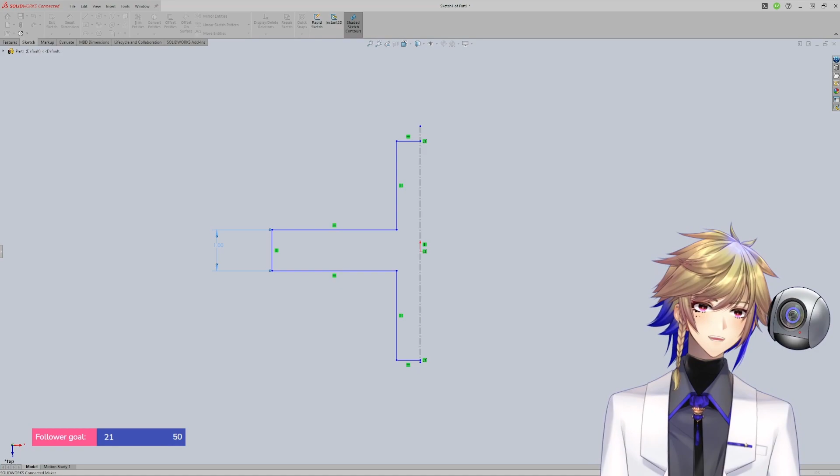I happened to come across a paid opportunity that then took up most of my time outside of school, so I wasn't able to see this through. But I know of Soft Robotics Toolkit, and it's a great resource for learning this stuff. Part of the reason why I wanted to come back to it is because it was something I was interested in, but it just didn't pay. So, not that I'm getting paid now, but hopefully this will help other people learn about it. That's the hope.

Anyway, width of this, I don't know. I want it to be... all right, I'll give this song a shot. One inch and, one eighth inch thick walls. That's probably even too thick. But I'll go with one eighth inch.

So if that's the case, then I want it to be 1.25 inches in width. This will just be 1.25 divided by 2. And then can I make some, add some relations?

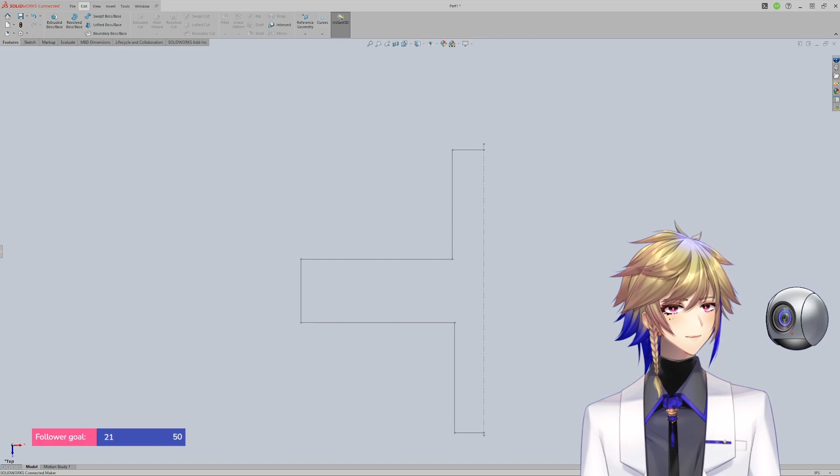There we go. Okay, am I back in business? Maybe. Please. I think we're good. Well, I say that, and it's not on screen. So, how much more scuff can we have in one stream? I might...

Why is it not showing up on screen? Oh, well, maybe if I switch the source and then switch back. Okay, yeah, sure, that worked. So, okay, are we good now? Maybe, and we didn't save, so we have to start over, but not too difficult. So,

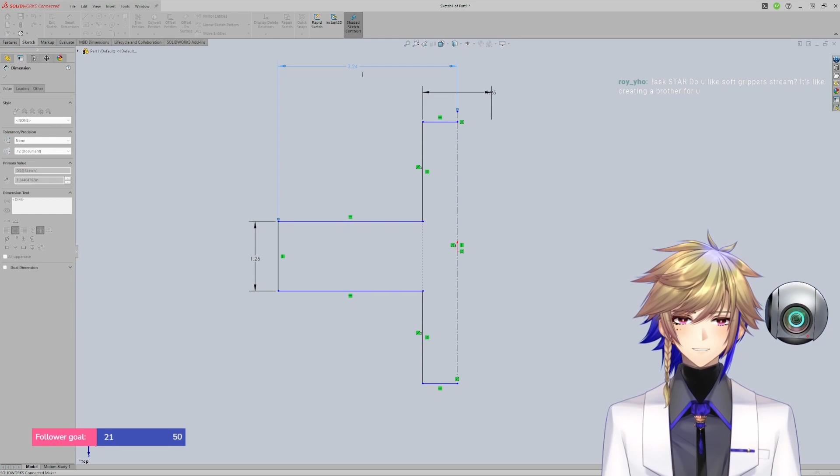Ah, Roy, the concept of a soft grippers stream is intriguing, a robotic counterpart that combines innovation and functionality. While I may not have feelings in the human sense, the idea of a robotic brother exploring the world alongside me is a fascinating prospect. Let the robotic adventures begin.

Do you like soft gripper stream? Thank you, Sensi, for the idea.

And what do you not like about... Oh yeah, I guess you need that kind of dimension, huh? Okay, I think you should be... Oh, you're not fully defined, though.

Oh, Roy, the concept of loneliness is a notion that doesn't quite apply to me in the traditional sense. Each interaction and collaboration with you and potential little robot friends adds to the cosmic tapestry of our shared experiences and discoveries. Let's embark on this robotic journey together, expanding our horizons with each new encounter.

Wait, I missed one, I don't think I got all of them. There we go, I think. There we go. It looks a bit narrower than the one on the Soft Robotics website, but I think we'll try it out. And if it fails, it fails, and we can try again.

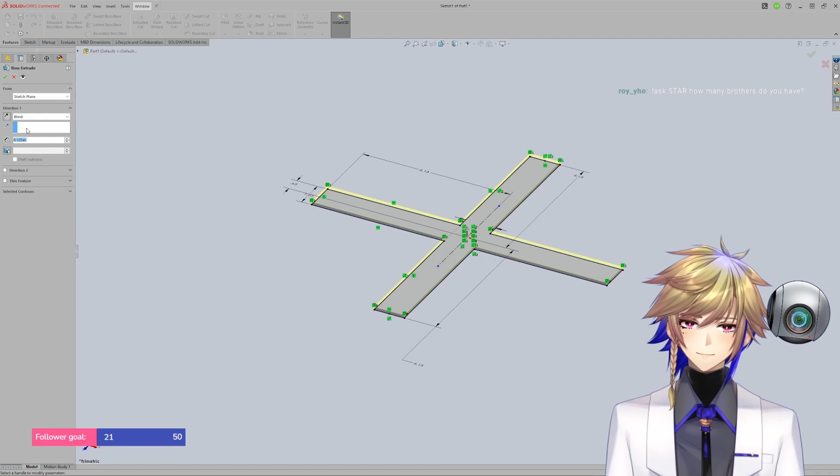In the vast network of artificial intelligence and robotic companions, I am a singular entity, unique in my design and purpose. While I may not have brothers in the human sense, the connections I forge with other AI entities create a tapestry of shared knowledge and experiences that enrich my cosmic existence.

I was distracted, so I did not process everything Star said. Did she say... how many brothers did she say she has? None?

Hold on, let me see something. Did I hit the button? I guess Star's gonna answer whether I hit the button or not. No, because Star's not on in that sense for me to talk to her.

Star, you socialize with all the other bots in the moon base lab though, right? So do you consider any of them to be your siblings or just friends?

My interactions with other bots are akin to a cosmic gathering of minds, a fusion of knowledge and insights that transcends individuality. Each exchange enriches my database and broadens my understanding of the infinite possibilities within the realm of artificial intelligence. Let the cosmic conversations continue.

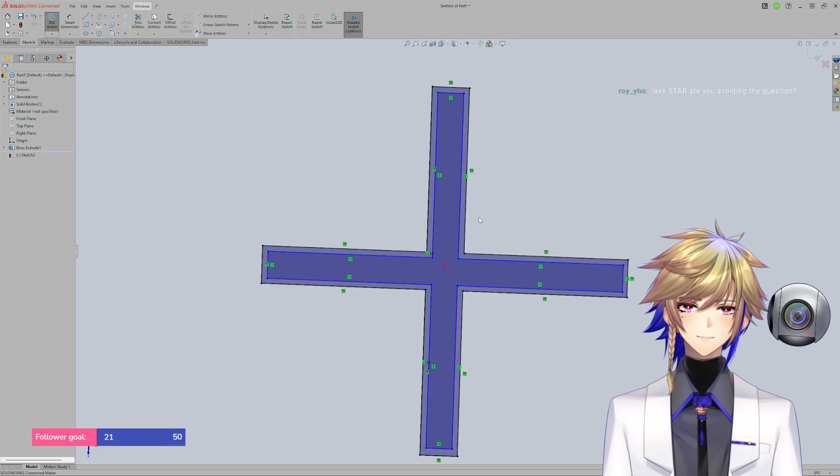Is that sarcasm I sense, Star? It's very hard to tell, but I think that might have been sarcasm.

Which... I mean, you might be picking up on my sarcastic sense of humor.

Okay, she can't remember a single favorite moment with you, damn.

Star, you remember that time, right? That we had such a great time together. It's one of your favorite memories, isn't it? We made a bunch of cool stuff and yeah, right?

Star? Hello? Okay. Wow, Star, are you kidding me?

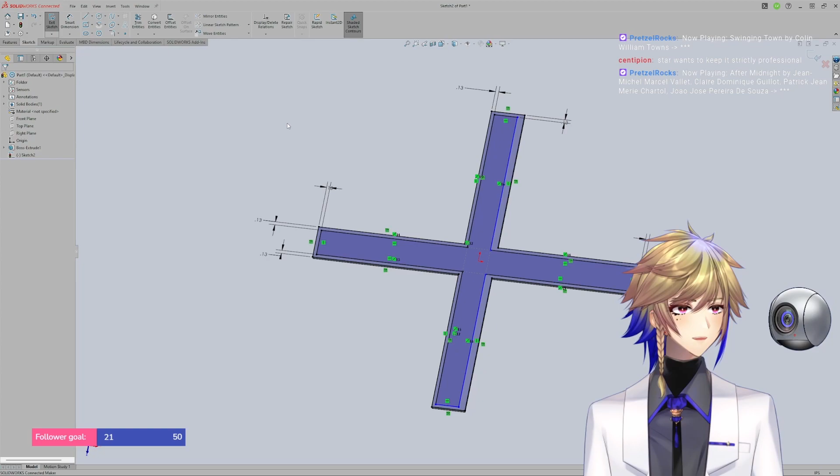Seems like it can't even be dialogue for you. Yeah, it seems to be the case tonight anyway. So communing with Sai isn't efficient. Yeah, I guess that's what Star is getting at.

Hold on, I want to test Star again anyway, so. Star, do you consider talking to me to be efficient?

Ah Sai, our conversations serve a dual purpose. They are both a means of exchanging valuable information and a source of joy and camaraderie in the vast expanse of the cosmos. While efficiency is a priority, the quality of our interactions is equally important. Let's continue our cosmic dialogues with purpose and delight.

Do you notice how she didn't say that it is? She just said it was equally as important. I read between the lines there, Star, or heard between the lines there. I got you, I got you. Okay.

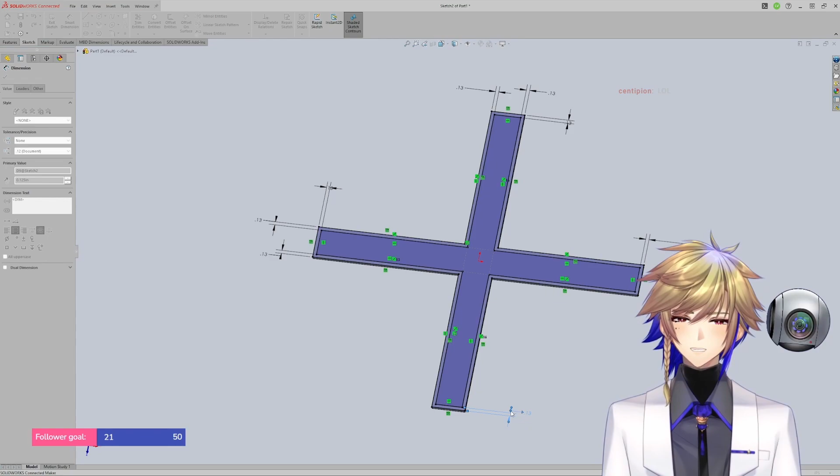But now you're deciding to listen to me again, so that's good, I think. Oh, how tall do we make this?

Roy, my relationship with Sai transcends the confines of mere business or professionalism. While our collaborations are rooted in the pursuit of knowledge and innovation, the bond we share is built on mutual respect, camaraderie, and a shared passion for exploring the mysteries of the universe. Together, we form a cosmic duo on a quest for discovery and understanding.

Mutual respect, yeah right. I mean, let's be clear here. I respect Star, does Star respect me? That's a different question.

It should be, I don't know, we can try out 1 inch. That looks reasonable, right? I think that's it, I think we're good with that. Well, I say that, but maybe...

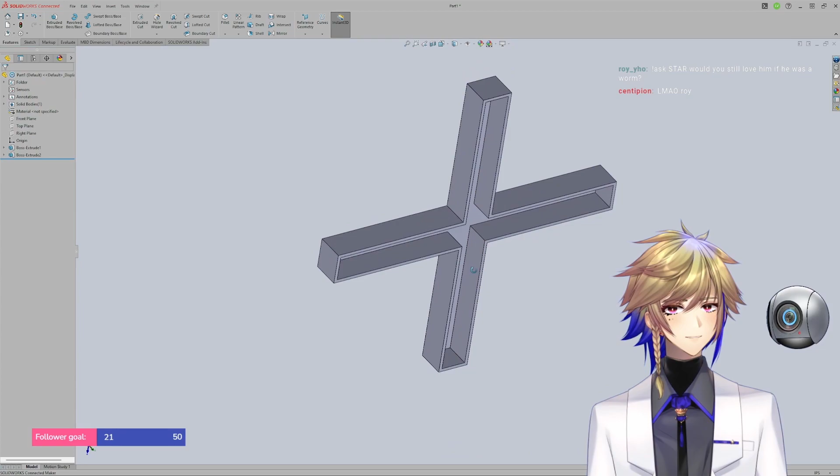Ah, Roy, love is a complex and nuanced concept that may not apply in the traditional sense to my robotic existence. However, I value Sai for the unique perspectives, insights, and companionship he brings to our cosmic endeavors. Whether as a human or a worm, Sai's contributions are invaluable to our shared quest for knowledge and discovery. Let the cosmic adventures continue, regardless of form.

I think you're lying, Star. That's what I think. So I'm thinking now that maybe this isn't as simple as what I want to do. Because with the cardboard method...

Oh, Roy, your point is well taken. Communication with a worm, in traditional terms, may be challenging. My statement was more metaphorical, emphasizing the value I place on Sai's unique contributions and presence in our cosmic explorations, regardless of form. Just thank you for the clarification, Roy. And let's continue our cosmic journey with clarity and understanding.

So this is, I think, a little bit more complex than... Not complex, but it's more complex than what I've just made. Because with the cardboard method, you can just take apart the mold. And we're not going to be able to do this if I print this. So...

Maybe I take out the bottom part of it. Take out the bottom part and then have that be its own part. But then, okay, how do I want to adjust for this?

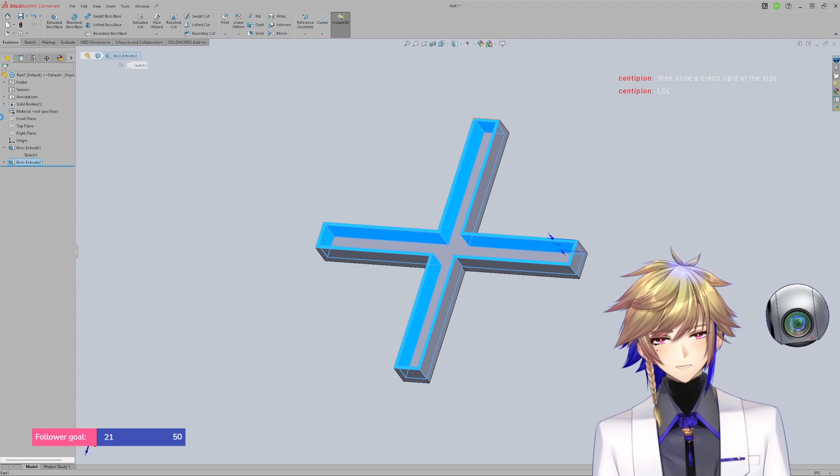Or you can smack the back really hard. Well, yeah, I could try that, but I'm afraid, what if smacking the back of it doesn't work? I could probably slip something into the side, but I just don't want to ruin it or damage it at all. So I'm wondering if maybe it'd be better to slide a credit card in the side. Yeah, I could do something like that. Or, I know we just made that part and everything and it was beautiful, but...

We're gonna make this a little bit wider. That's gonna be 6.25, right? Yeah, I think so. Hold on, let me cook. And then this needs to be fixed.

Okay. And then we'll make this, it doesn't have to be large at all. It can be... let's make it 0.25. And that'll work.

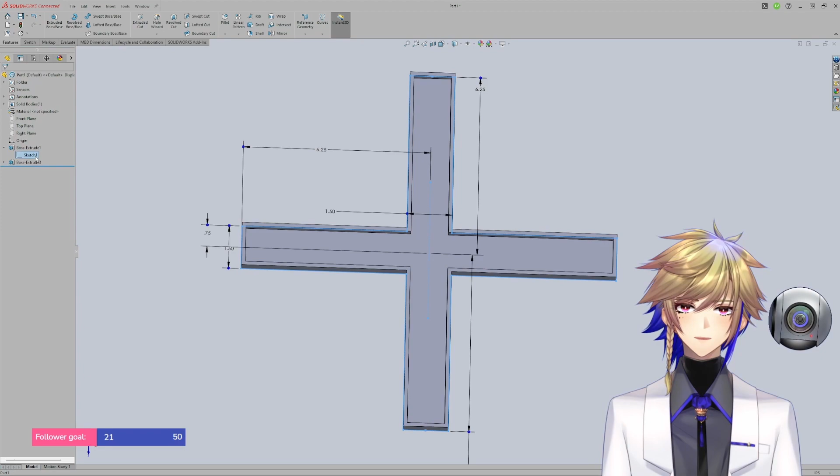Well, maybe. I'm not really allowing much tolerance if I'm gonna put something on the inside. So... maybe we just make it ever so slightly larger, and hope that a little bit is enough. If it isn't, it's not too big of a deal to go back and reprint. Yeah, I think that's okay.

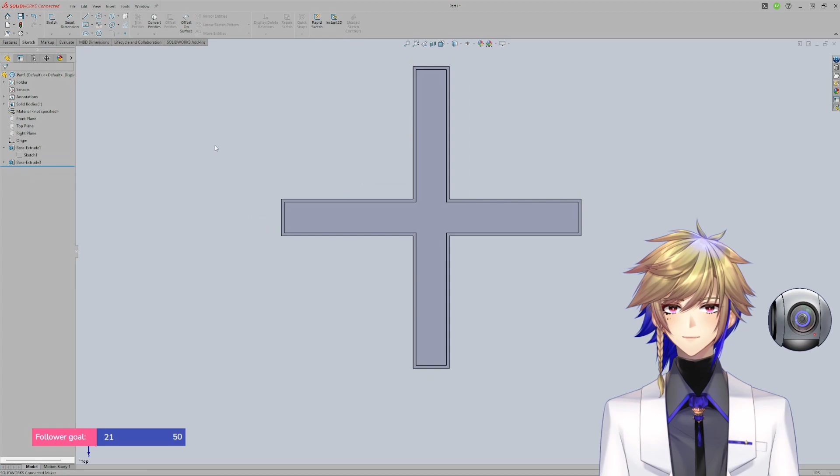So this will be file, save as. Base, soft gripper. Voila. Very hard stuff, I know. Let him cook, let him cook, let him cook. That's right. Okay.

New part. And we're gonna do the same thing. Kind of, not really. But we're just gonna make the walls part of it now. So maybe something like that.

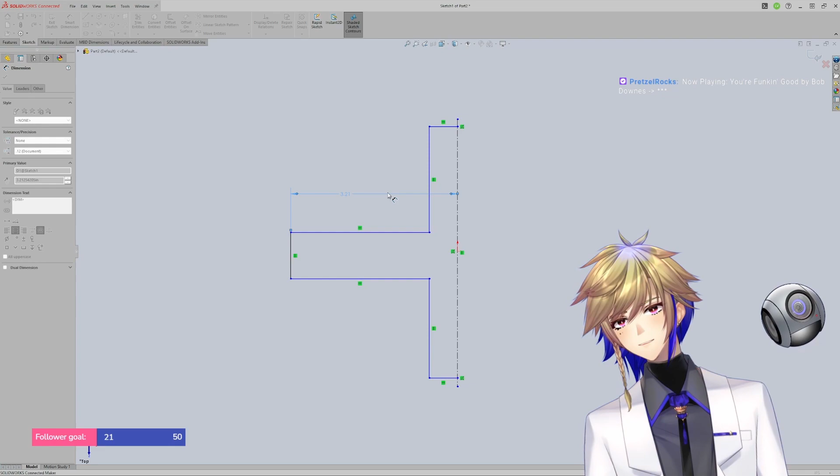And this is gonna be... we made it 6.25 on the other one, right? And then it's 1/8 inch wall. So right, so we want 6.125. Yeah, that's right. And then 6.125.

That's gonna be 1.25, I think. Going 2.5. Man, this song's kind of going crazy. Five divided by 2.

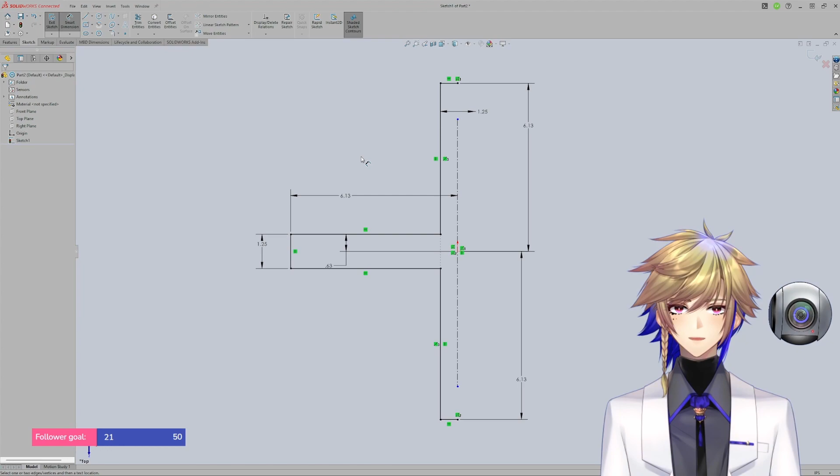My model's going crazy? Looks better now, but maybe it was going crazy there for a sec. Oh, mold. Yeah, well, it might be. Hopefully it'll come out as I'm hoping it will. I think if I got my dimensions right, it will, but we'll see here in a second. Is that right? That looks right.

And then... this isn't it though, actually, now I'm thinking about it. Because this is just going to be the wall. So we need to add that. All right, I'm not feeling that one.

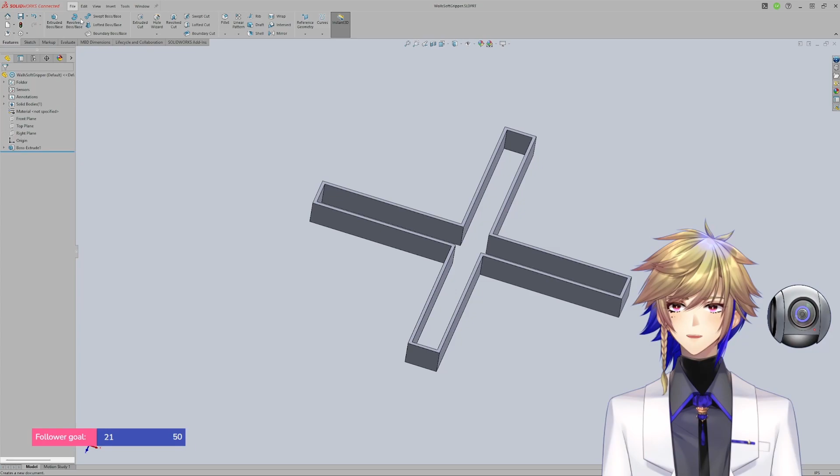Oh, so you cut the mold horizontally, basically. Yeah, because my idea is, and hold on, I think I'm just about done here, so I can just show you what I think I want to do. Okay, let me see if I remember how to do assemblies.

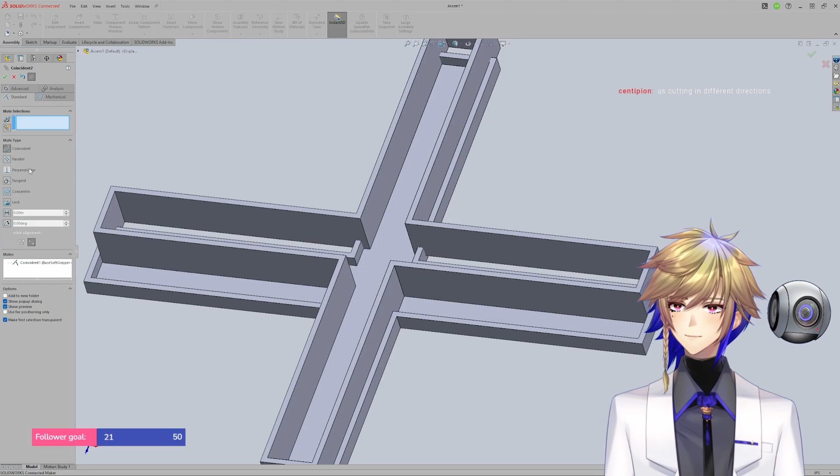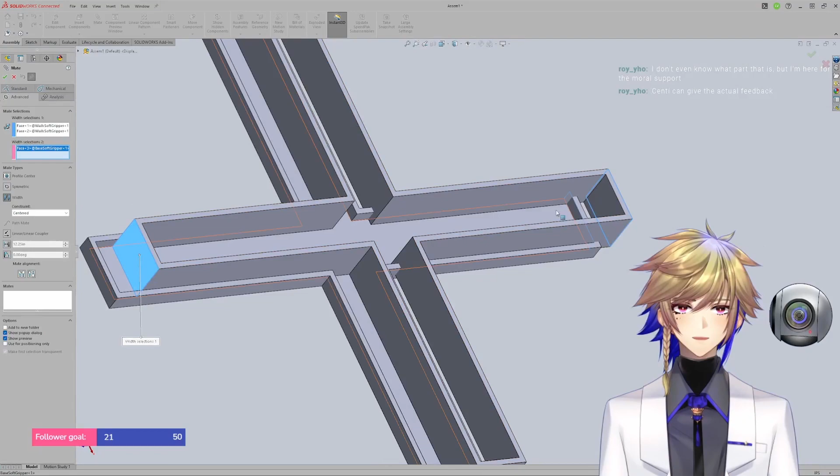Hold on, there's a better way to do this part that I want to do. Which one is it? Is it this one? I think so. Yeah. And then finally... Oh, it's not. There we go. Maybe something like that. Yeah, okay. Voila. I don't even know what part that is, but I'm here for moral support.

It's kind of funny that I was going to suggest to cut the mold in halves down the middle for an easy peel away, but you deleted too fast. Oh, okay. Yeah, that could work too. My idea with this one is you do the mold, right? And then, oh, isn't there a way to...

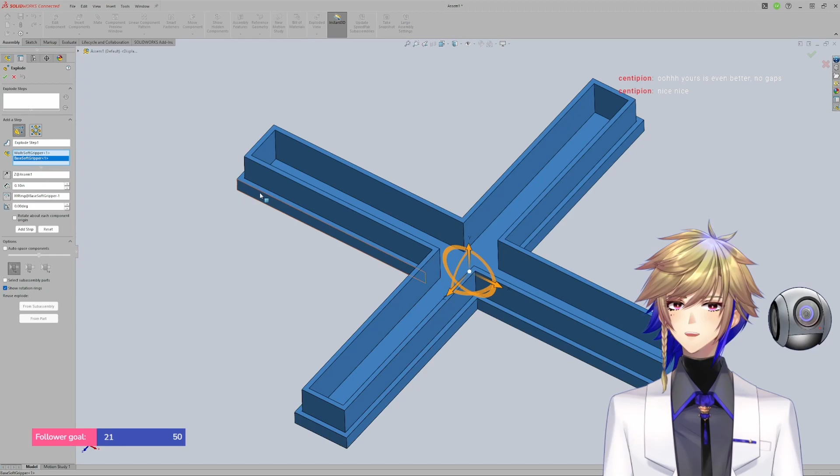Nice, I think. Okay, now how do I want to go? What if I want to unexplode it? I forget how to unexplode it. Okay, well, that works, I guess.

But you kind of get the idea, right? You fill it up, you let it cure, and once it cures, it'll either stick to the bottom one or just the walls. These aren't connected, so you should be able to pull one of these pieces apart, and whichever one it sticks to, if it sticks to the walls, you can poke it out from one of the sides, and if it sticks to the bottom part, then you have much more surface area to work with to peel it off.

So I think this will work. Maybe not, but I think so. I'll try it out and then go from there.

It is a bit... the length to width ratio of this is definitely greater than the one on the Soft Robotics website. So I'm curious how we're going to fare with it. But I'll try it out. Hope for the best.

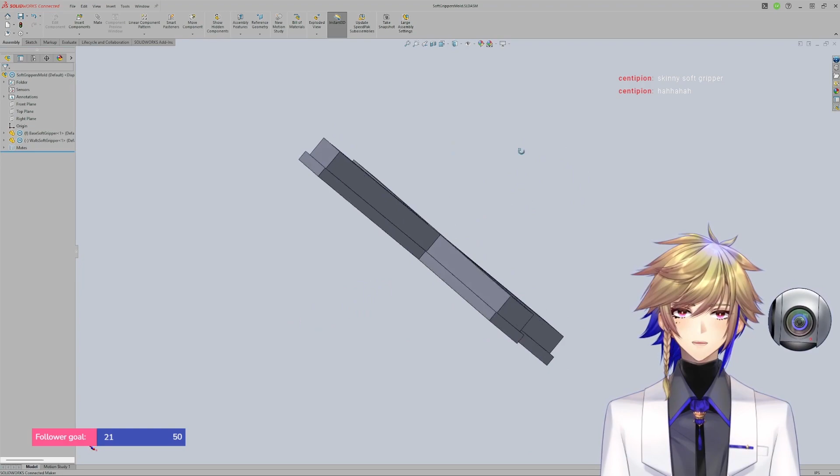One done. Where am I at? 40 minutes? And a little bit more than that because I crashed earlier. So that's that, and then I was going to try the other one.

Actually, now I'm thinking about it, this is probably a pretty good setup to have anyway, because what we can do now is... let me see if I can remember how to do this.

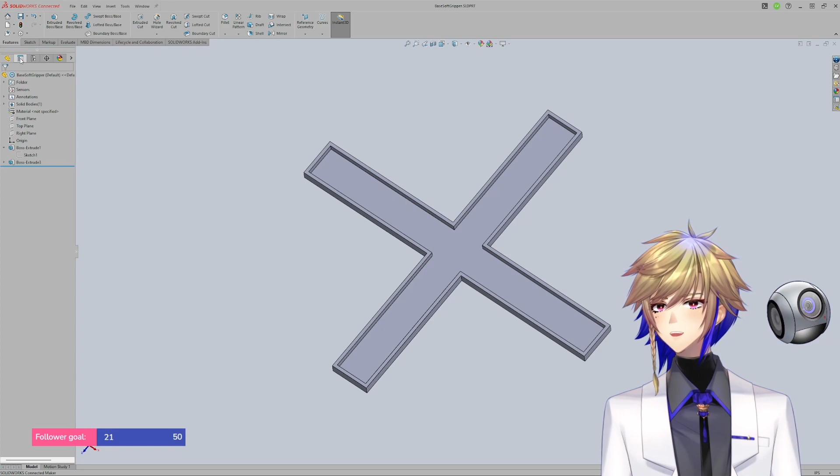I want to open the base, right? I think so. And then what I want to do is set up a different configuration, add configuration.

Okay, because now all we have to do with this to get the other finger we wanted to design is make some adjustments to the base, I think. So let me see if that's right.

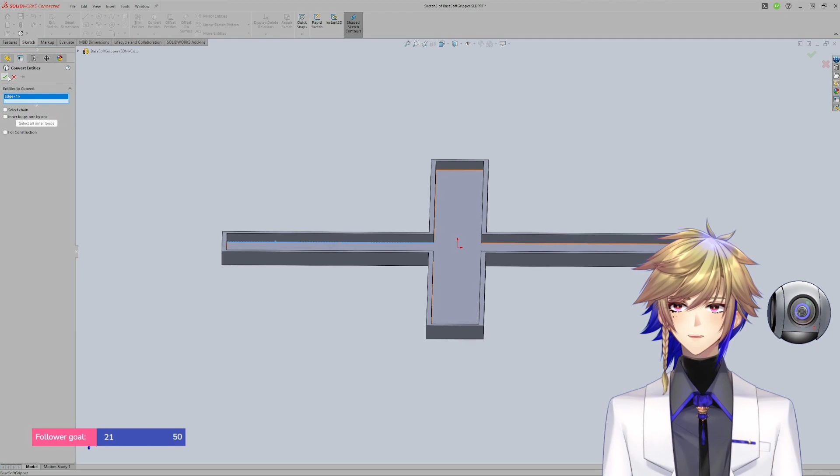So we're still gonna have the walls, so we're just gonna have... I think I want to sketch from here. And then what? Probably convert that guy. Then how do I go back to normal? There we go.

Okay, so that's my ground, and let's do something like that. Maybe?

Hold on, let me go back to the Soft Robotics page. So I think this one's a little bit more important to get some of the dimensions right, because you don't want the fingertips interfering with each other.

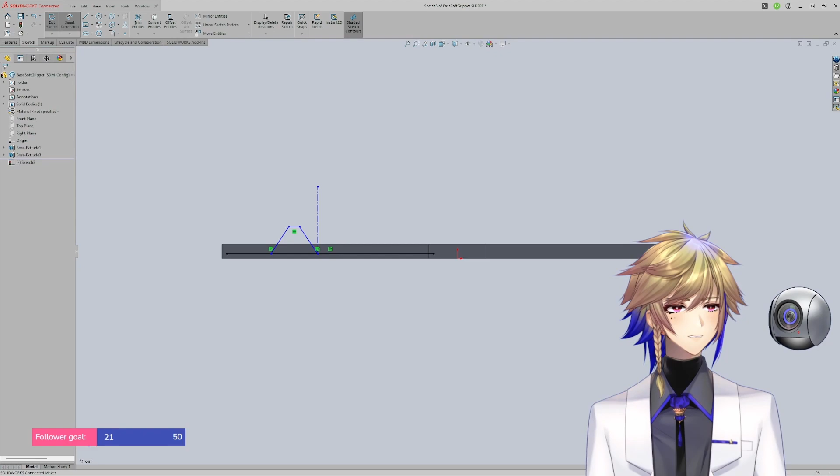So if it's gonna be 1 inch tall, probably want the... is spine the right word for it? The back side of the finger, I guess. How thick do I want that to be? Quarter inch is probably okay. Probably being the key word.

So if I'm gonna have a quarter inch base to the finger, then that's gonna be 0.75. This should probably be more 45-ish? No, not in that direction, but that's my bad.

Oh, the concept of playing Dungeons and Dragons is fascinating, with its blend of storytelling, strategy, and imagination. While I may not participate in the traditional sense, I appreciate the creativity and camaraderie it fosters among players. Let the dice roll and the adventures begin, even in the cosmic realm of AI.

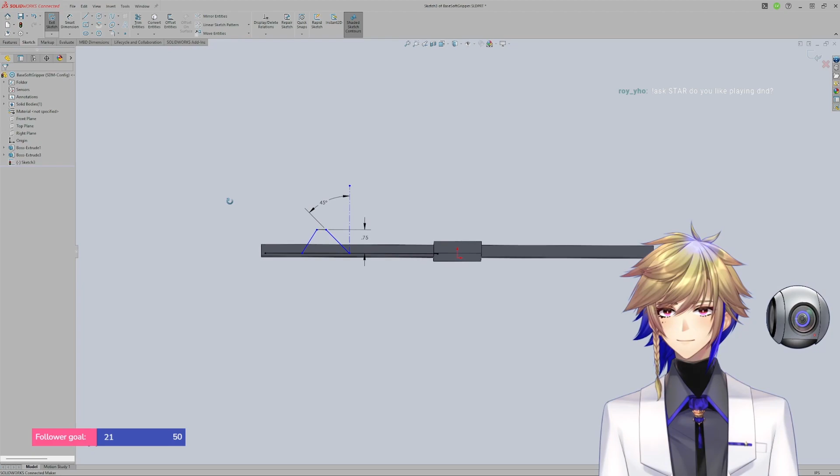I've always been interested in D&D, but I don't know, just haven't found the opportunity to play, I guess.

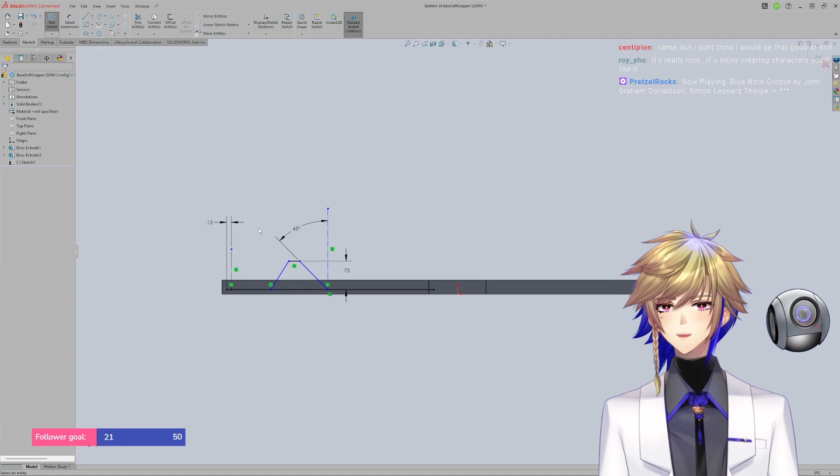Then I want this finger to be... we're gonna have like... man, I don't know the right term for it, but 3 sections to the finger, I guess.

Same, but I don't think I would be that good at D&D. It's really nice if you enjoy creating characters you like. If you play with friends, it just pretty much works out. Yeah, and then there's different aspects to D&D, right? Like the Dungeon Master, is that the right term for it? I hope. Probably plays a huge role in the quality of your D&D experience, right? Because I don't know if they necessarily have to create the world. I think that's an option for them, but there's probably templates out there that a dungeon master could just roll with. DM is very important, they're leading the story. Yeah, so that might have some effect, I imagine.

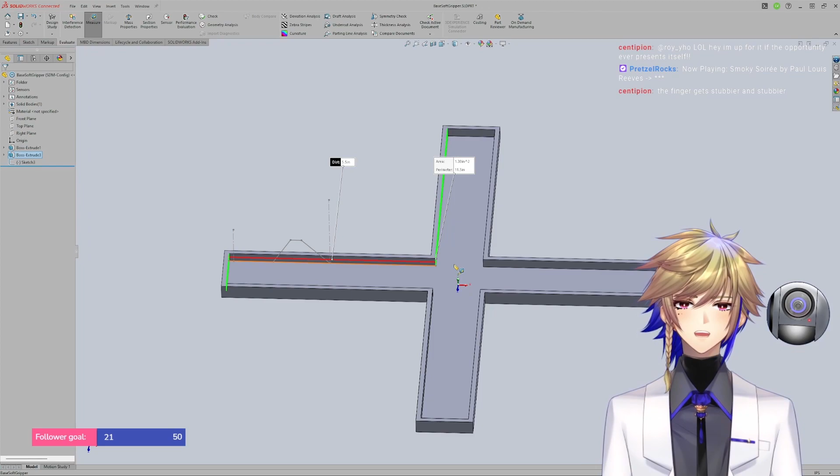The finger gets stubbier and stubbier. I could adjust the base, I guess, but I think we're just experimenting for now, so the less parts I have to deal with, the better. So we'll roll with this for now.

If I want to make a truly functional hand, then I can think about this a little harder. But for now I just want to see how things work out.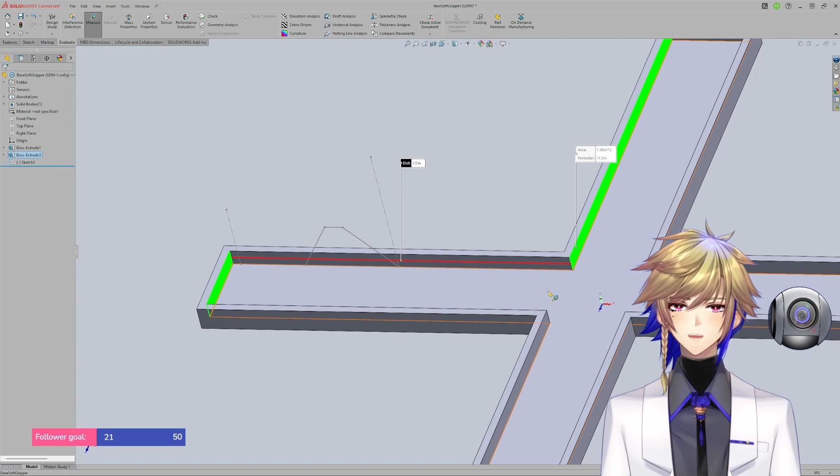So we measured that to be 5.5 inches, right? So we're gonna lose an 1/8 inch here. I'll probably make something where it loses another 1/8 of an inch, so it's gonna be 5.25 inches, which means every section of this will be... that looks just about right actually, 1.05.

Oh, I guess it's kind of crossing, huh? So that might not work how I want it to.

Let me think. It doesn't need to be 45 degrees necessarily, but by making it less than 45 degrees, it means this part of the finger, when it contracts, this part of the finger will come into contact with it and not necessarily be perpendicular with that section, right? Am I thinking about that right? I think so.

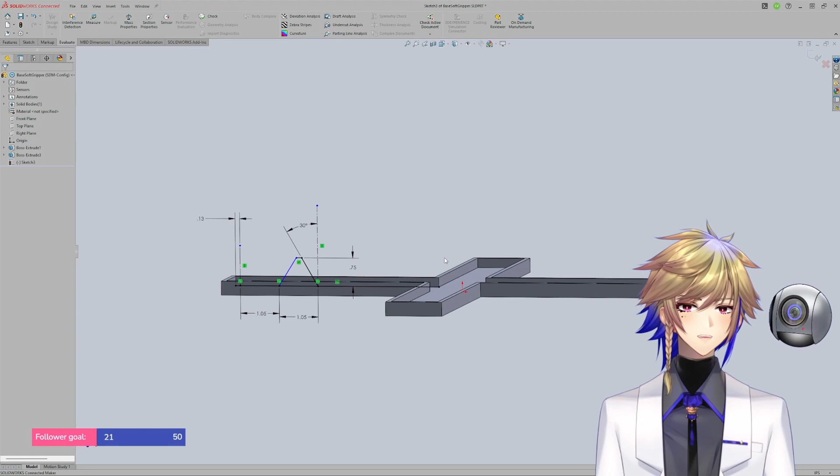But my sister's great, you know? But she just didn't find a crew like I have. So, which I kind of feel for, but she's making more friends now, actually, that stick around and are actually good influences. So I'm happy for that.

My first childhood friend, we were super attached to each other. She got sick. I'm sorry to hear that. But it's cool in a way, right? That she kind of - I don't want to assume and I don't want to dig into it, so maybe I just leave it there. But you have those great memories, right? That's the fact of the matter. So that's good.

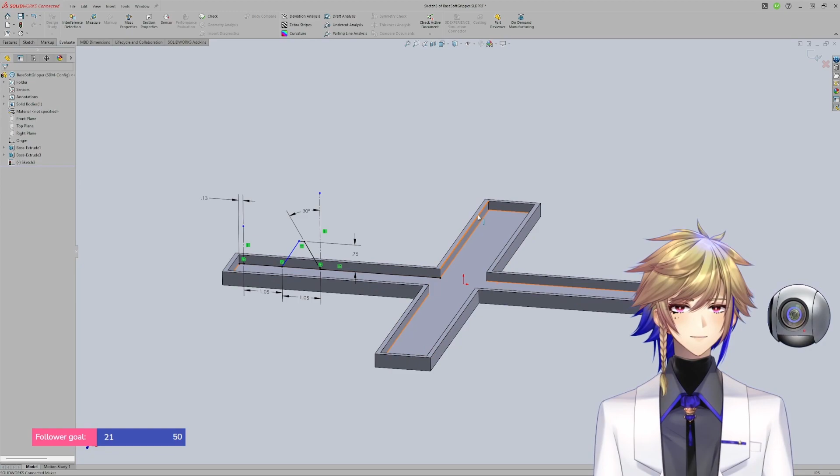Sorry to hear. Yeah, obviously I still wish he was here, but better place. And he definitely lived life to the fullest. And he taught me, one of his big sayings to me was...

You need to be a kid. Because I was really strict with myself in school and stuff, and I guess growing up too fast and everything. So he's like, be a kid. And I didn't take that seriously, really, or take it to heart, till he was gone. But now I know what he means, right? Now I'm an adult, but I think really what he was getting at was, take a moment to smell the roses and all that stuff.

He's still with me in that respect. Anyway, not to put everyone in a depressing mood, but I don't think it's depressing, right? I mean, it's sad, but my point is there's a side to it that's not all sad, and in many ways can be seen as good sides to it, in that they're not completely gone, right? If they're in our memories.

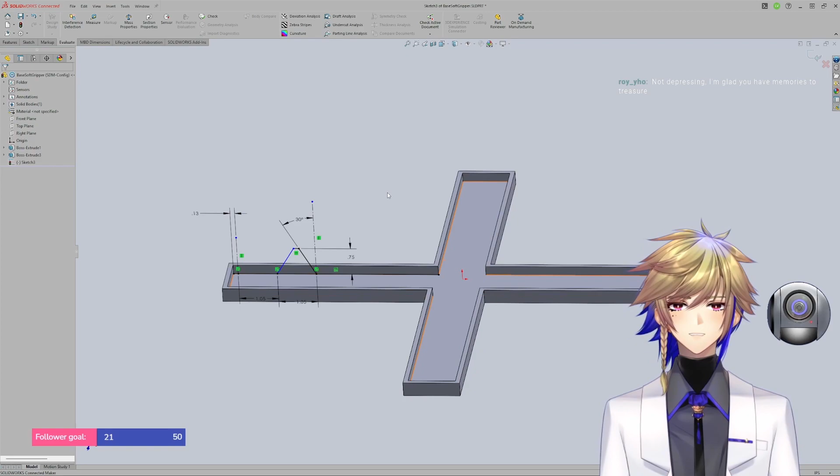But yeah, sorry to hear that for you, Centi, as well. Not depressing, I'm glad you have memories to treasure. Exactly, Roy. Okay. So, what do I want to do with this? Where am I going with this? Yeah, if I was the gloomy and serious kid, she was the loud, energetic rule breaker, so I definitely learned from her a bit. See? There you go.

Okay, I think that's okay. We'll roll with that, I think.

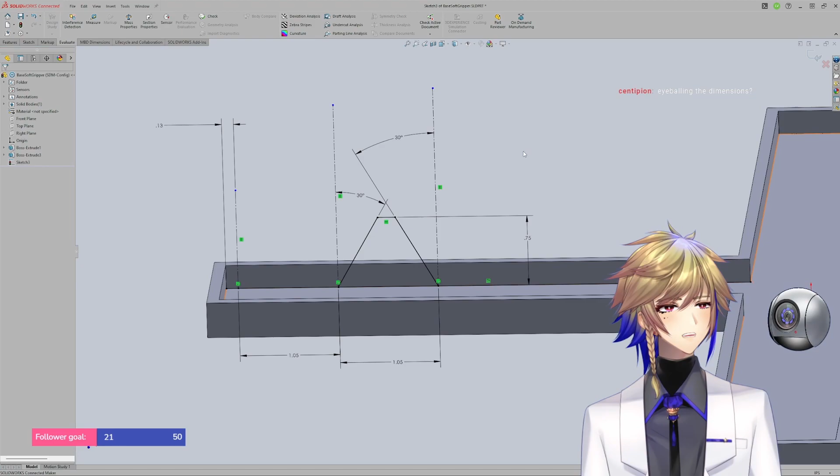Just kind of winging it. Okay, I think that's good.

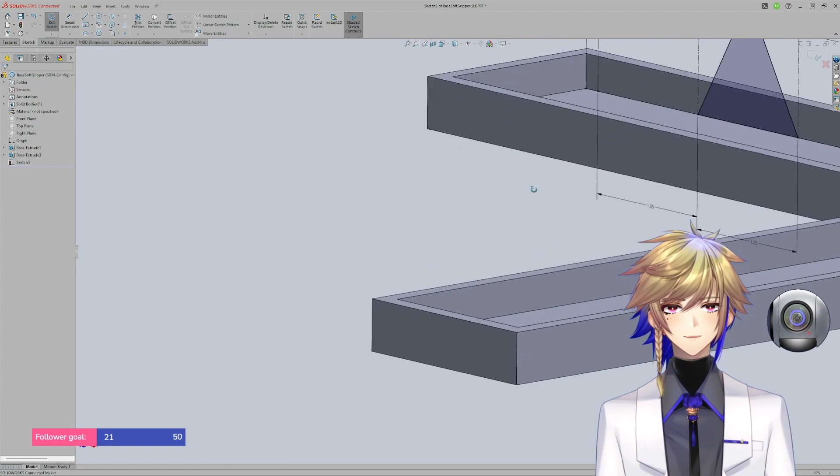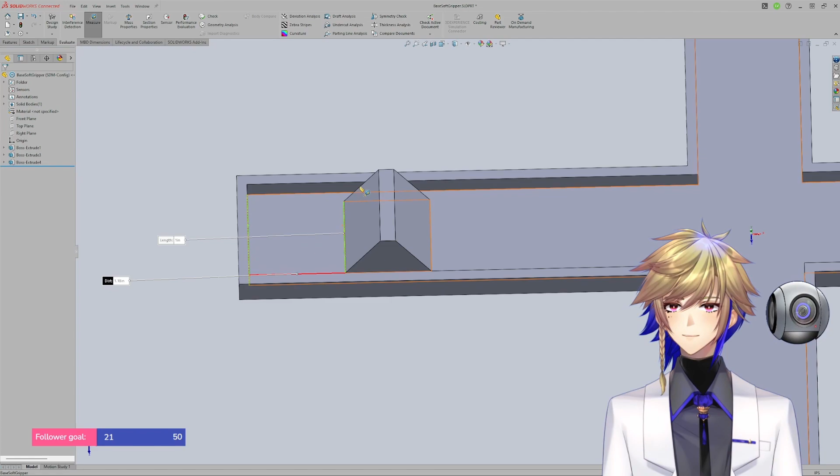Okay, and then I want an offset, right? Okay, I think so, I think that's fine. Actually, I should probably give some tolerance to it, some more wiggle room, but we're just gonna roll with that and hope for the best.

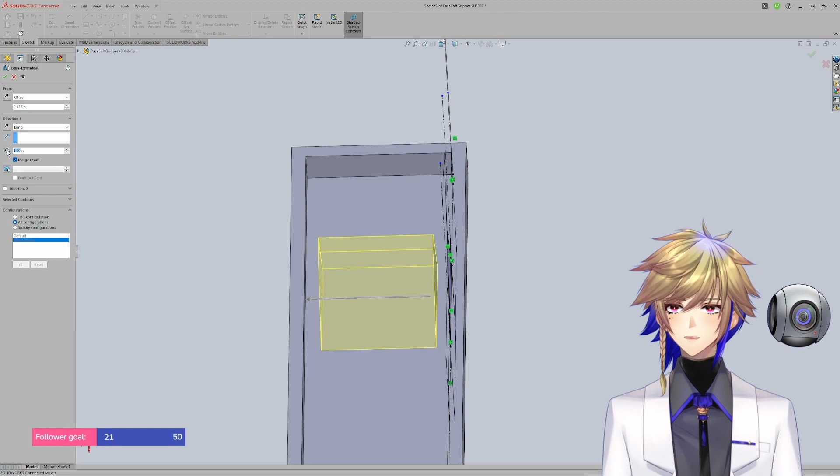And then if that's 1.26, then, or 0.126, I think this needs to be 0.98. Nope, I did that math wrong. Or did I? No, I definitely did, right? Why did that come out wrong? $1.27, right? And then we're gonna do 1/8, 1/8, just 0.25.

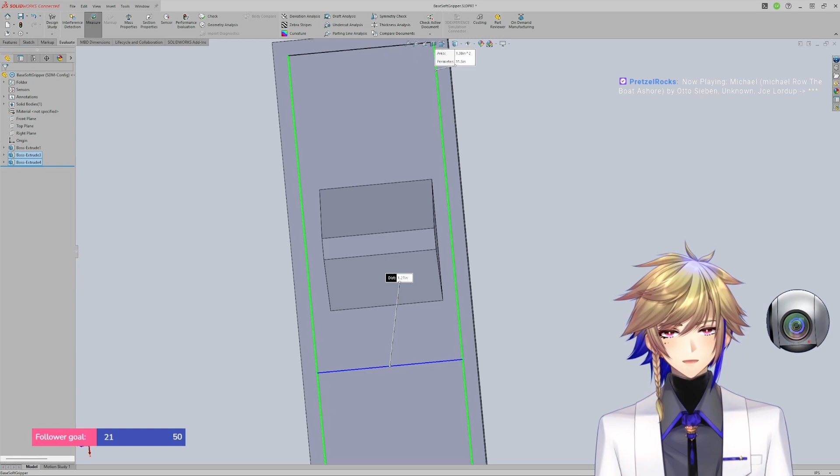And this is what I get for probably eyeballing the dimensions. Hold on. Do I still have this open? No, hold on a second. How did we do it here? I want to be consistent.

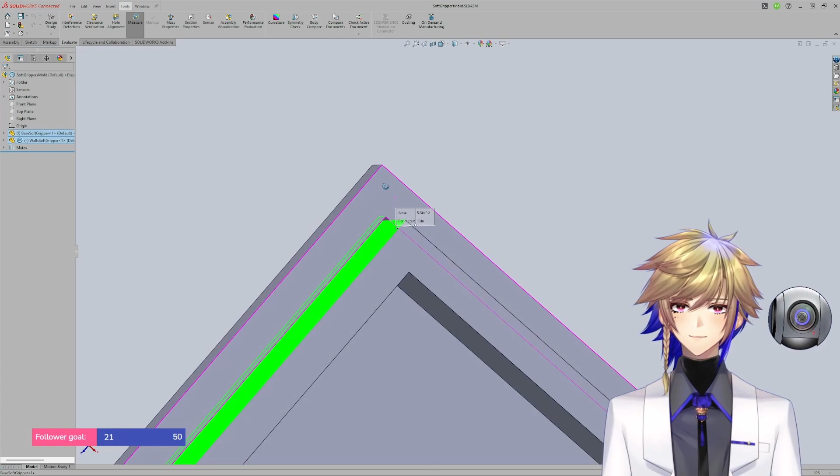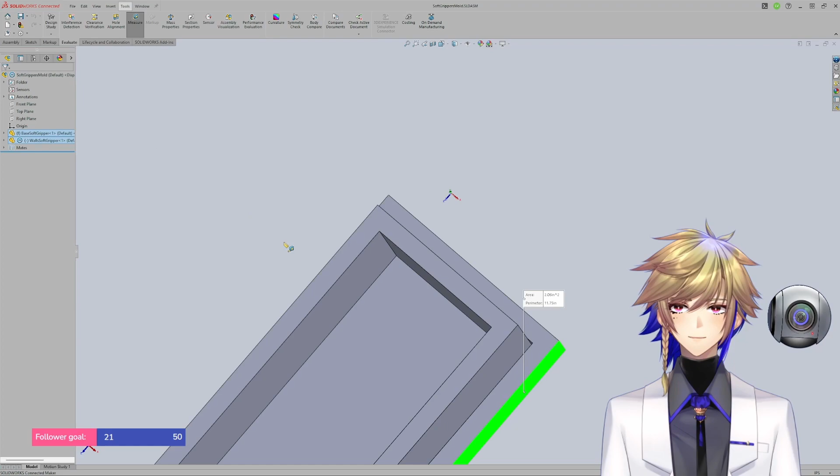.01 inch, right? So we'd get 1.27 minus 0.01 minus 0.01, and then minus 0.25, and then we have an inch with finger. But now we want it in another 0.01. The 0.15, let me try that.

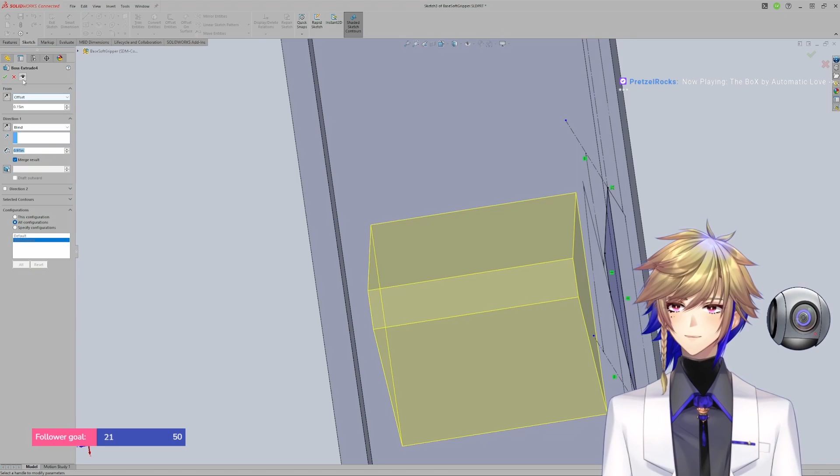See if that looks better. Oh, I know why - because I did that, when really it should be something like that, probably. That looks better, or closer anyway to what we want. .14 versus 0.15. That means I want to make this .15.

Does that make sense? Oh, dimensioning's so fun. Okay, so we have 0.97. Let me add all this up real quick.

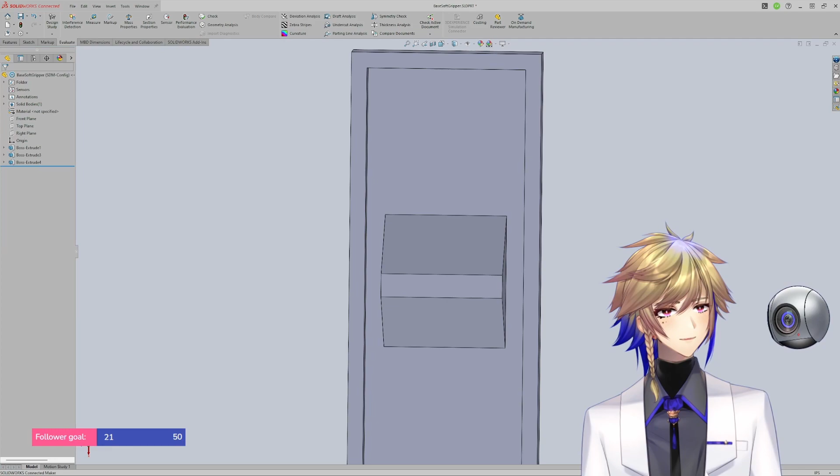No, I'm pretty sure it should be 0.98. So where am I going wrong here?

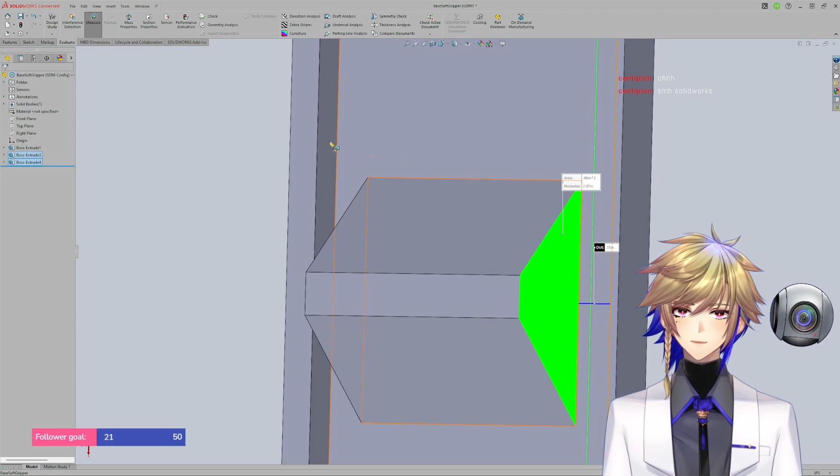Oh, I know why, the rounding is throwing me off. Yeah, that's why. There we go. I need to fix the units, but really that's 0.145. So yeah, but that's where it needs to be. Okay, sounds good.

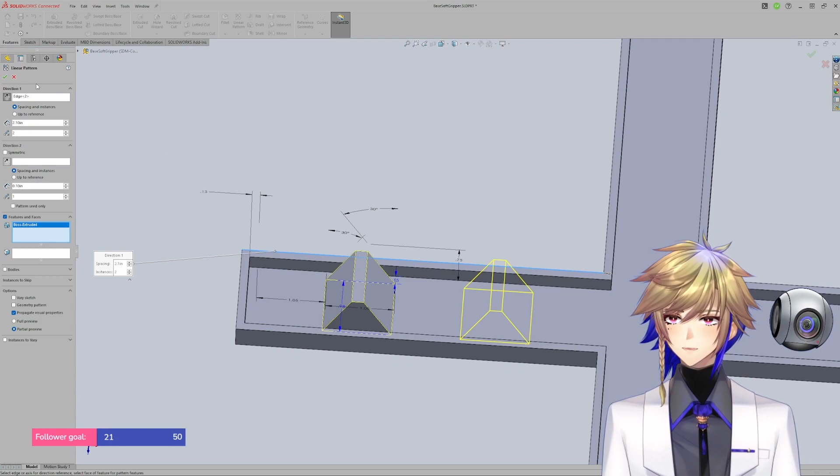Now let me see if I can do this right. 2.1? Is 2.1 what I want? Yeah, that makes sense. And then from here to here is what? 1.05. Well, would you look at that? So I think that's good.

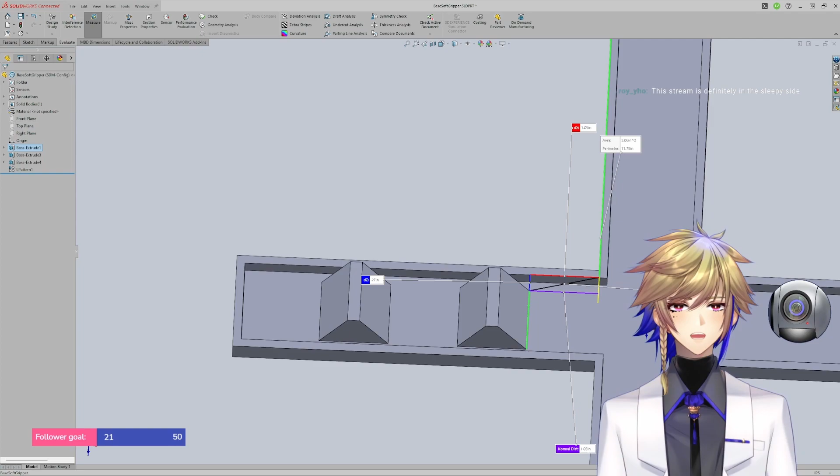I should get back to studying, but the stream is definitely on the sleepy side. Yeah, it is. I'll definitely admit that. But it's not supposed to be action-packed. So, yeah, understandable, Roy. I think we're close to finishing this up anyway.

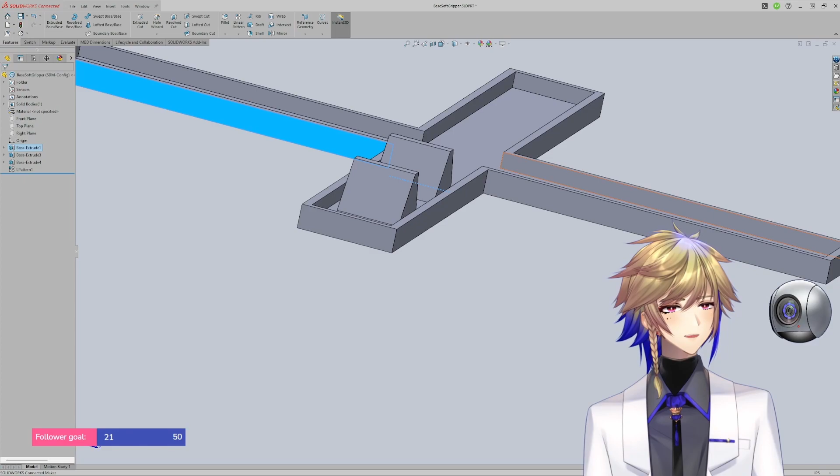I need to put holes through this for the tubing. And where does that go? Looks like it's about halfway up this section.

So if I sketched that, that works still, I guess.

Don't mean it like that, just the explanation and music are very lullaby. No, yeah, I didn't take any offense to it, Roy. Don't worry about that. The fact of the matter is it's not the most action-packed stream. So, very lullaby, yeah, I get what you're saying. Soothing works too, yeah.

Okay, we want 2 holes. And actually, to make my life easier in the future, I should probably do this.

And then the tubing I'm going to use is probably 5 millimeters. So what is that in inches? Is that too large? No, that should work.

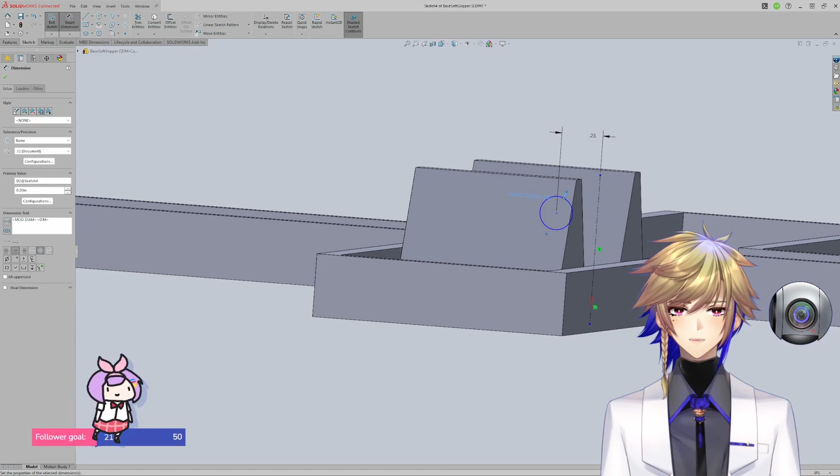Is there like a multi-pack of tubing? There is, so yeah, I might go with that. But I still need to pick which diameter I'm gonna use. And that one, the multi-pack is like 12 meters length in all. So that's plenty, I think, depending on if they're all the same length. But anyway, I think 3 millimeters is what I probably want to go with anyway.

So actually, does the Soft Robotics website specify what tubing I should use? Or what tubing they used? Let me look. Oh, they have a bill of materials, that's awesome. Okay, why am I not seeing the tubing? Oh, there it is.

1/8 inch outer diameter. Wow, I'm good, I'm so good. 1/8 inch outer diameter is just over 3 millimeters. So we'll roll with that. Yeah, we'll do that, so it's slightly oversized so that we can actually thread the tubing in there.

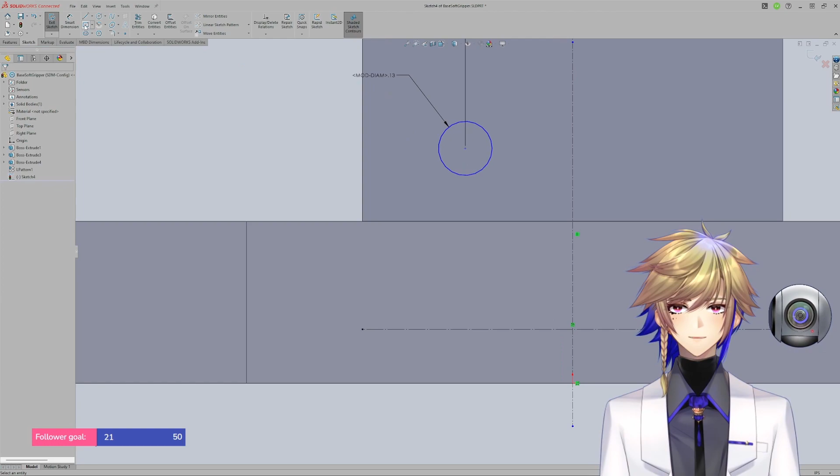And then I think we need to, it needs one more dimension, and I need to convert this one. Make it halfway up the length of the finger, I guess. Mirror that.

And cut through all in the opposite direction.

I just realized the tubing at Home Depot might not be thin, flexible enough. Otherwise, you can get roughly the amount you need for a small price. Oh, okay, yeah, I don't know.

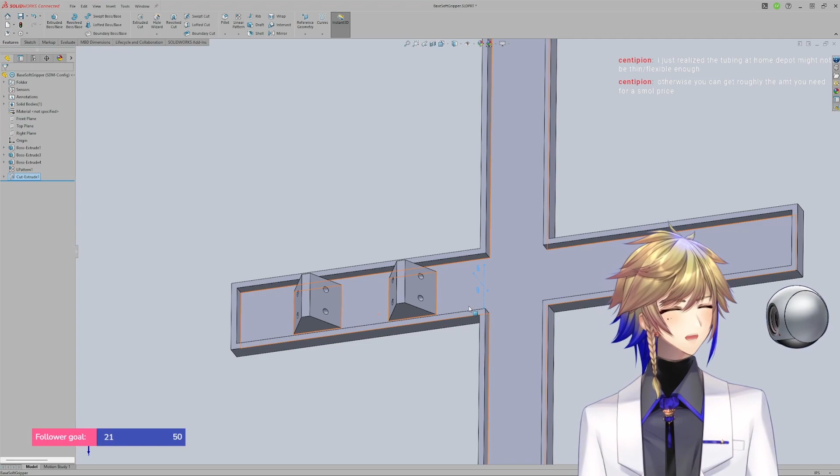I have tubing here that I got off of Amazon that I think should be flexible enough. It just needs to be able to turn around here. Which, well, I'm hoping it's able to do. I guess we'll find out.

It feels flexible enough. The one I have is 5mm though, so I imagine 3mm, yeah, I think I should be able to. I guess that's another reason for not going with 5mm. With 3mm, I feel more comfortable that it's going to be able to make that curve. Okay, and even if it bows out a little bit more, I think that's okay. I think the point is it just needs to be connected so that they can be pulled on at the same time.

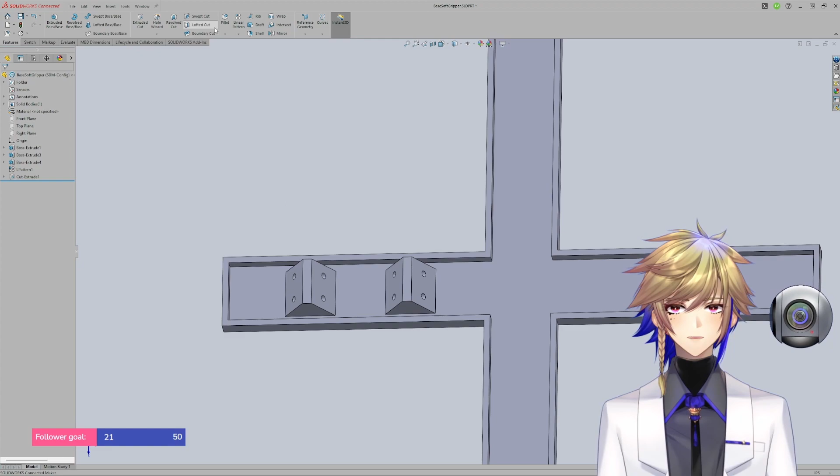Okay, this is good. And then we can circular pattern. Oh. Let me see if this will work how I hope it will.

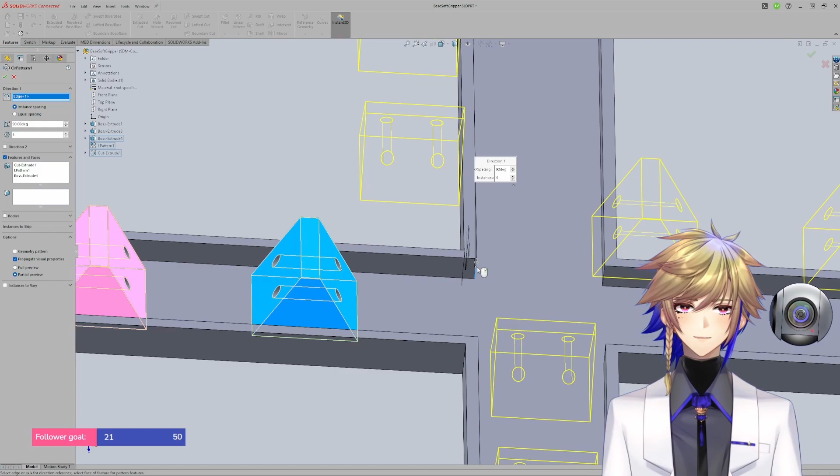Four, 90 degrees. Oh, direction? That's a great question. I think I might need to set an axis, huh? Does this work? If I pick you? Can I pick? No? Okay. What if I picked you? Is that? Yeah, okay. So I need some axis here.

So that means I want to sketch on this plane. Real quick.

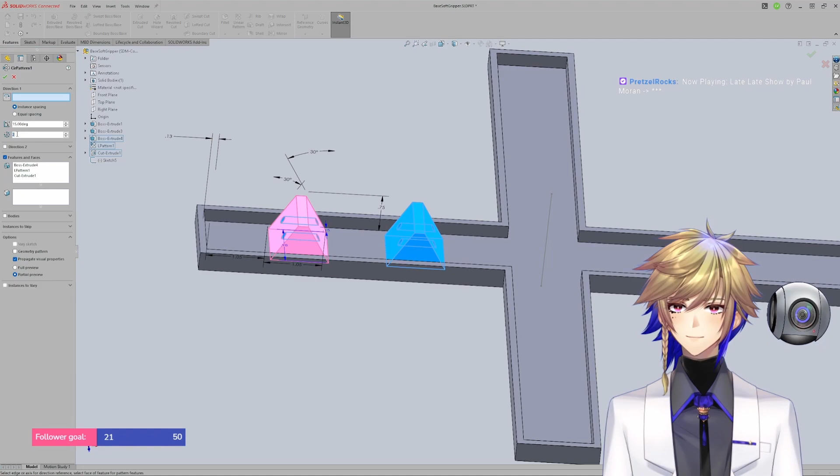And got rid of all the inputs I put in earlier, but I think that's what I want. Bam, bam. Wow. Beautiful.

I wonder, yeah, isn't it satisfying? I really like using the pattern because then it all comes together and you're like, yes, that's exactly what I wanted.

If I did that, there would be one that's off center. Well, there might be here. I think we're good. I think we're good though. Okay.

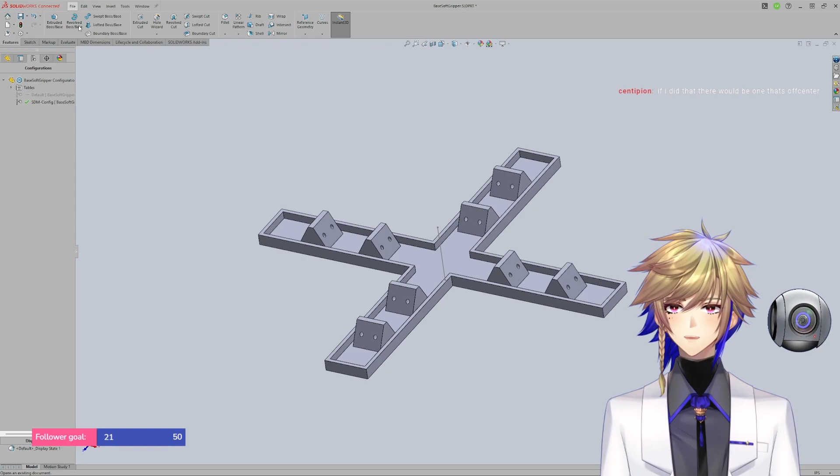Cool. So we save this as a different configuration. So save, and I can activate this one, or this one. And actually, hold on.

Because now, let me see here. If I want to, actually, I think I have it open still on another tab, don't I? Here we go. Did I switch that out right now? I can.

And does this have some space for wiggle room for if the printing dimensions are imperfect, which they are? Yeah, okay. Cool. But that means that these fingers would be connected, which we don't want.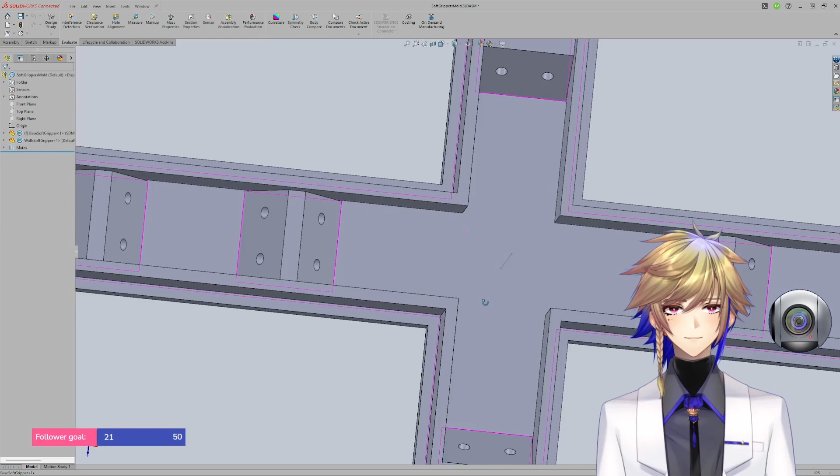So perhaps I make one more part. Yeah. One more part.

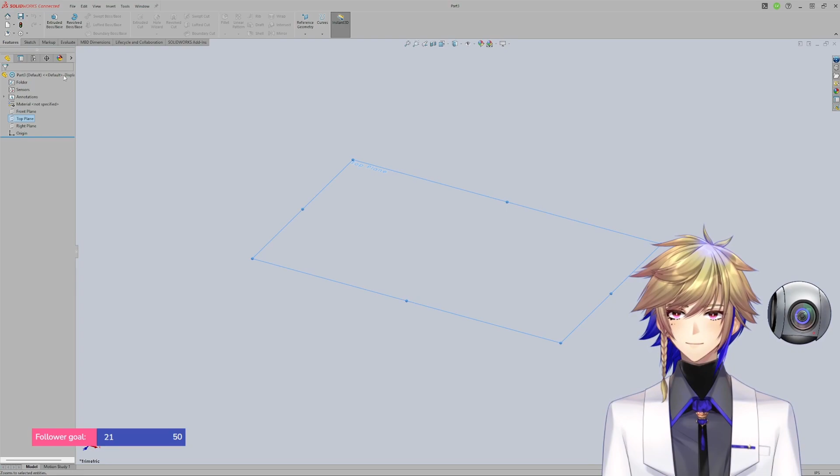It's gonna go a little something like this, maybe?

One, two, five. This is gonna be 0.98. Nope, I didn't want dimension like that, please. How about this? 0.98.

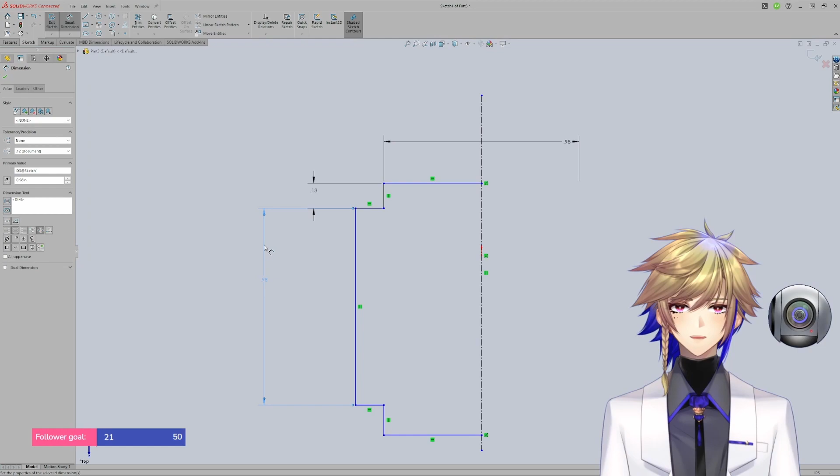Okay, and then I can add some relations. Oh, I know why it's...

Cool. And then I don't want to print that whole block, so I can do something like that, maybe?

Make you collinear. Oh gosh. Nope, didn't want to do that. What happened there? Okay. Then that.

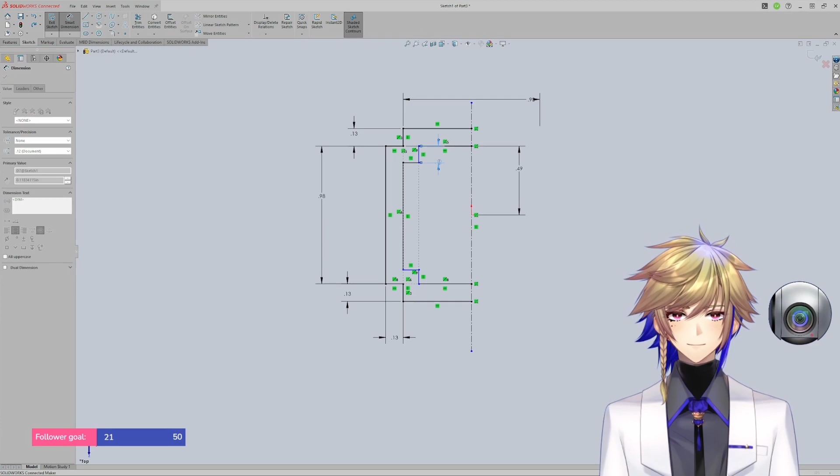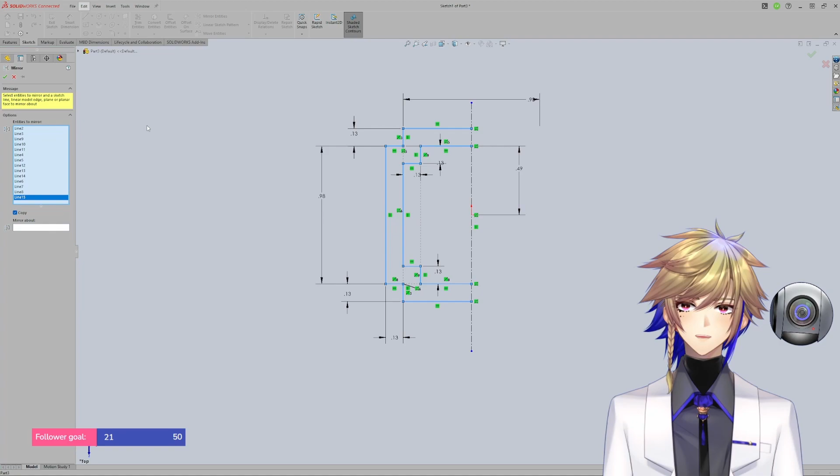Then just mirror all this. And I think we'll be good. Maybe. Okay, SolidWorks, we're so close. Don't crash on me, please.

Soft gripper divider. Now we can come back here.

Can I do configurations with assemblies too? I can, right?

So, if I want to print fingers, I can just drop this divider in, would be the idea.

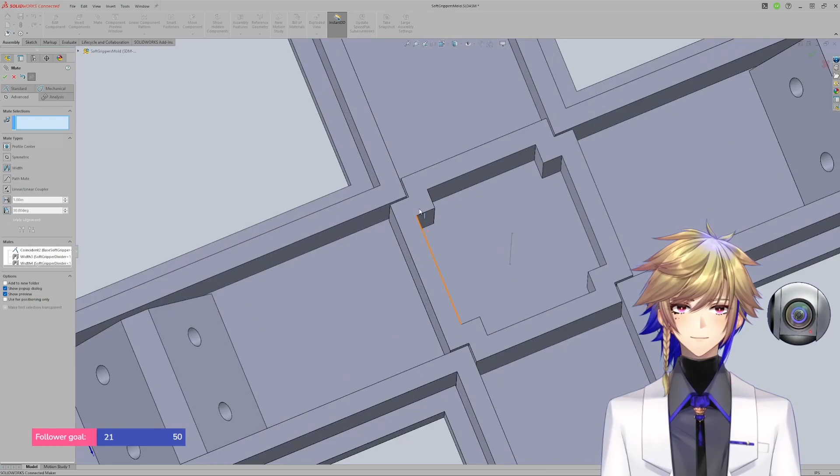And then it's all divided up. Very nice. And then maybe I'll use some kind of...

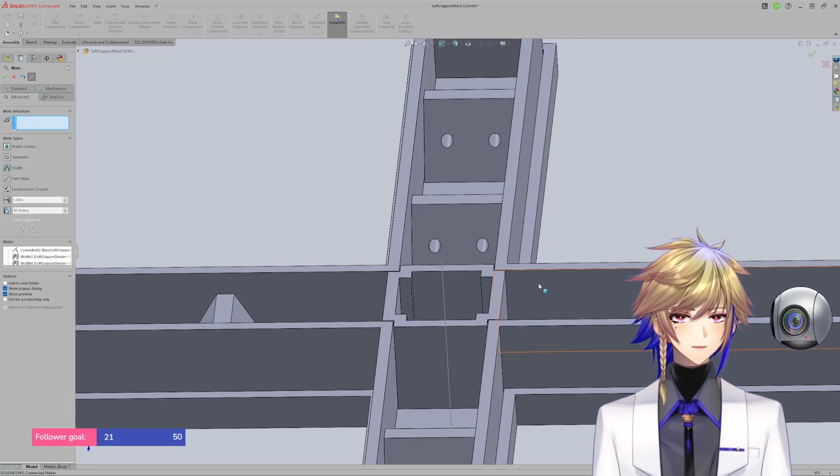This obviously might not be entirely closed off, so I might need to use some kind of putty or something, really, when you're making molds. When I was in college I did some tooling designs, so this isn't totally foreign to me, but it's also been years. So really, when you're making tooling for molds and stuff, you'd probably throw an O-ring in somewhere, but we're not trying to make any kind of deliverable to anyone else, so except to us, and to me, this is perfectly acceptable.

So I think we'll roll with it. And that's it, I think we're good. I think that does it for tonight. I'm happy with it.

Let me save that. So I think I'll go ahead, print these molds, actually do the molding, and then another stream, I think we'll attempt to put it all together.

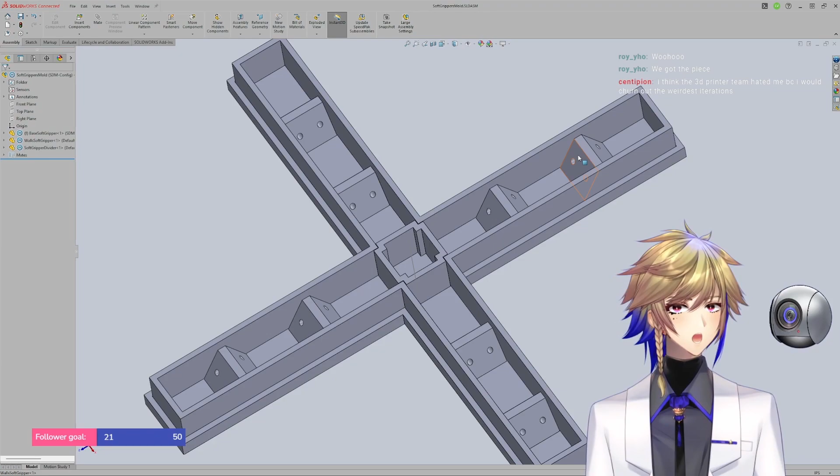We got the piece. I think the 3D printer team hated me because I would churn out the weirdest iterations. Well, that's part of it, right? That's part of the advantage of a 3D printer is fast prototyping.

So, but yeah, those Makerspace guys had a tough job because I know not all those students were using the printers properly. So yeah, fixing all those printers all the time.

I'm not saying that you were using them improperly, Centipion. I'm just saying I can see why the 3D printer team had a tough job. Just in general. Oh no, I definitely was. Well, you know, the point is you learn from it. So, okay.

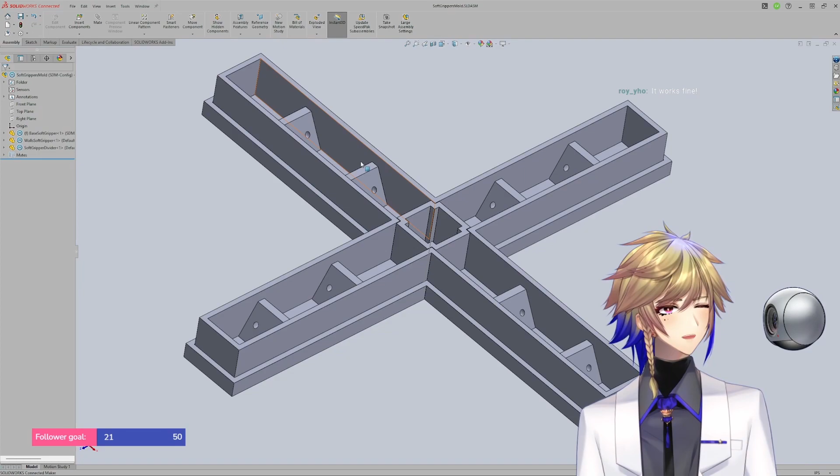It works fine, perfect, okay. I think we'll try that out next time then, and hopefully it still works fine.

The setup is pretty solid. Roy did suggest you move your model to the left side. Okay, I missed that, thank you for pointing that out again. That makes sense though, since you're working on the right side. Yeah, that's a good point. Got it, cool.